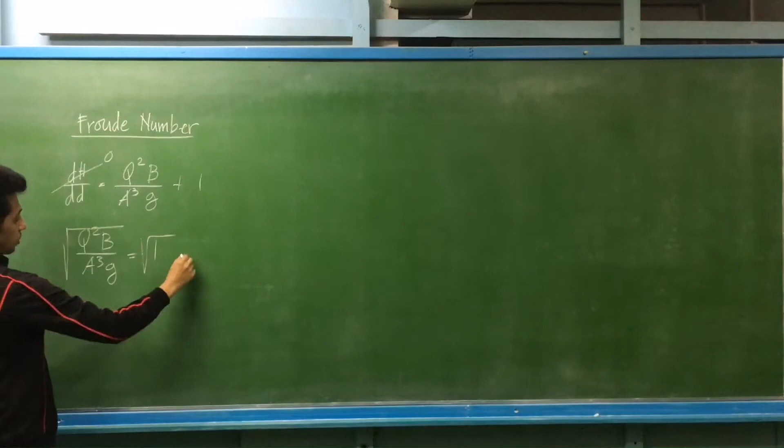So it's the same as discharge squared B divided by area cubed of the channel equals 1. If we take the square root of both sides, this is still equal to 1, or this is equal to the Froude number. So we have the formula for the Froude number for any shape of an open channel: the Froude number equals the square root of discharge squared times the top base, divided by area cubed times the acceleration due to gravity.

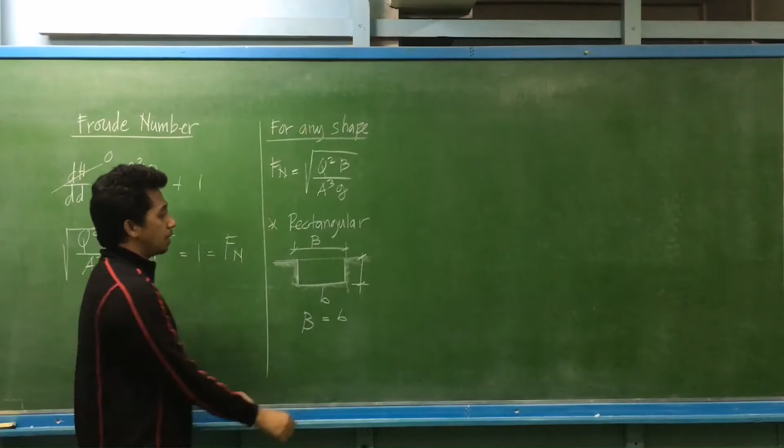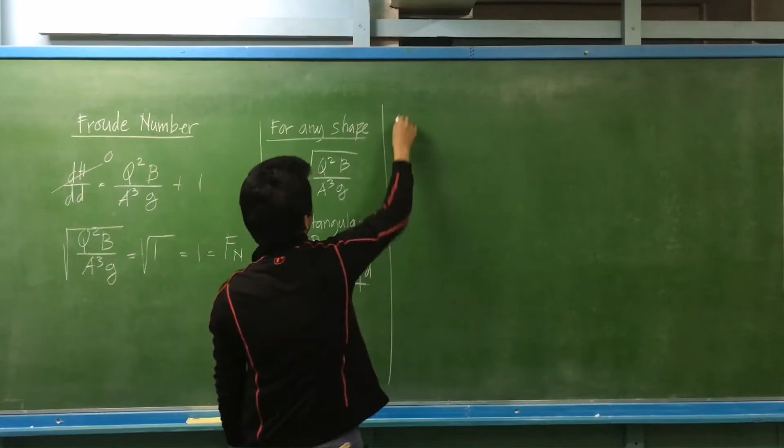So how about for rectangular? So for a rectangular channel, it has another formula since the top base of a rectangular channel is obviously equal to its bottom width. Let's say the top dimension is capital B, and this is small b. Basically when it's rectangular, they're the same. So we can simplify this formula for the case of a rectangular channel. The area of a rectangular channel is obviously base times depth.

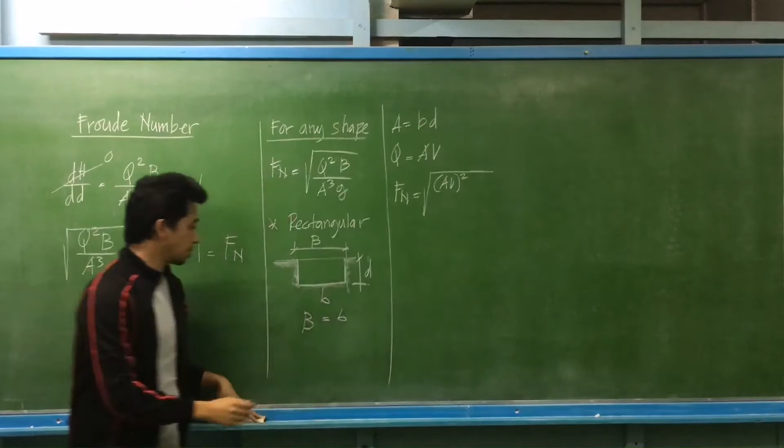What is the equivalent of discharge? Discharge equals area times velocity. So if we simplify this, the Froude number equals the square root of area times velocity squared, times the top base—but the top base is the same as the bottom width when rectangular—so I'll put it as small b, divided by area cubed times g. So we have the Froude number equals the square root of velocity squared times b, divided by area, times acceleration due to gravity.

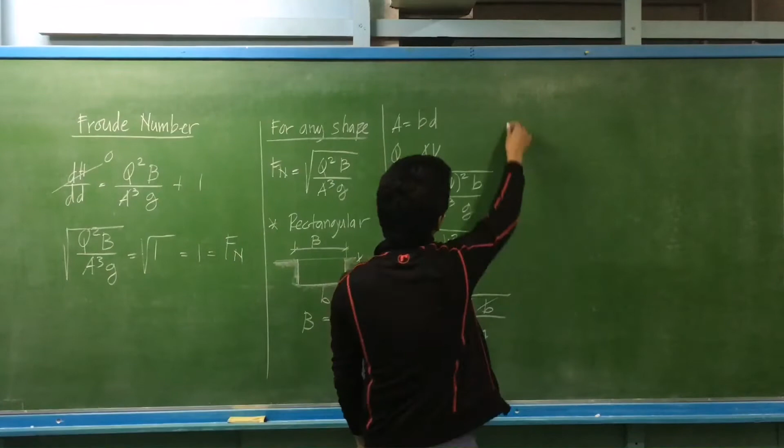So the Froude number equals the square root of velocity squared times the bottom width of the channel, divided by area—what is the area of this rectangular channel, that's base times depth—times acceleration due to gravity. We may cancel b, so we have the formula for the Froude number for a rectangular open channel equals the square root of velocity squared, divided by the square root of acceleration due to gravity times depth of flow. This formula is applicable only for rectangular sections; for any section, use the other formula.

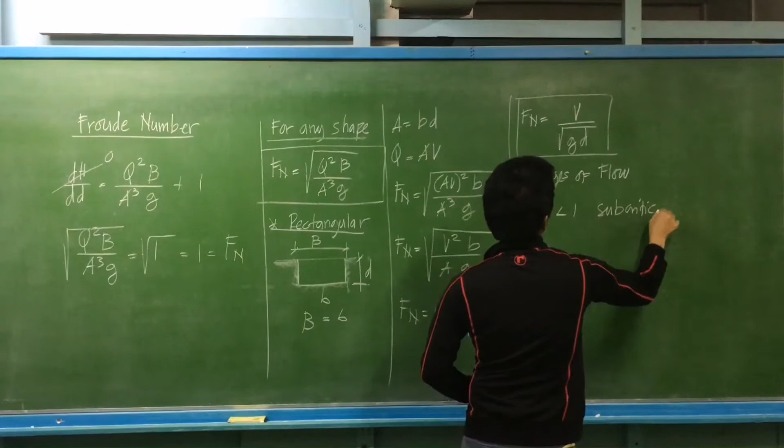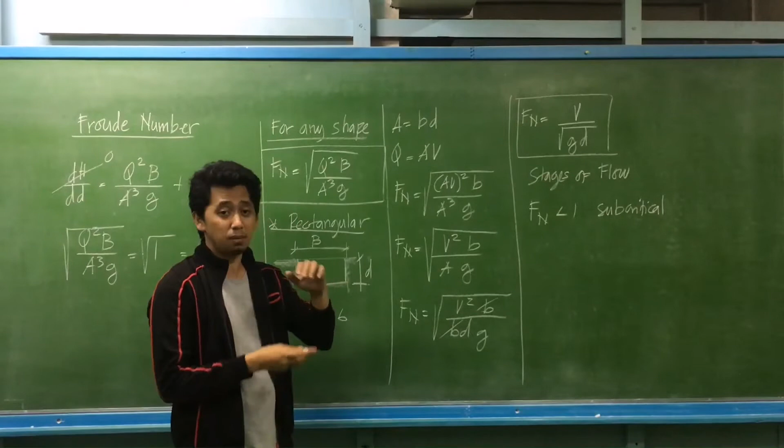So what is the purpose of the Froude number? That is to identify the stage of flow. So we have the stages of flow: if the Froude number is less than 1, this is subcritical flow. If we say subcritical flow with Froude number less than 1, that means a very low magnitude of velocity—slow flow—but the water in the open channel is deep.

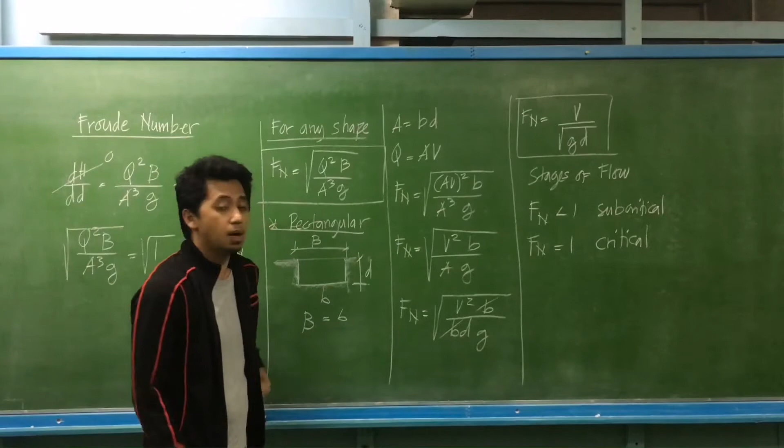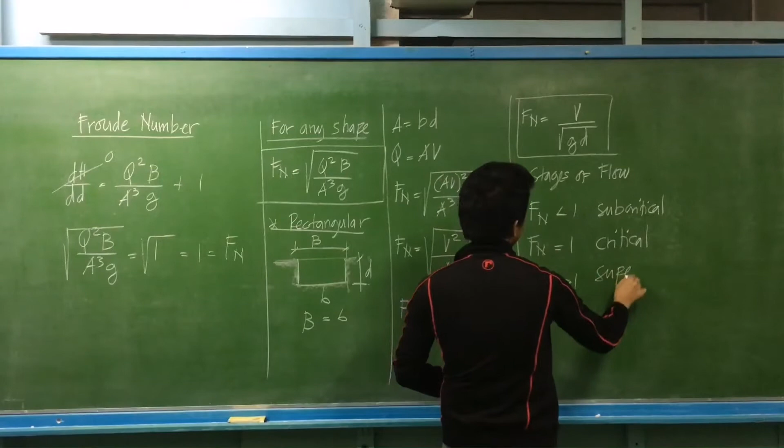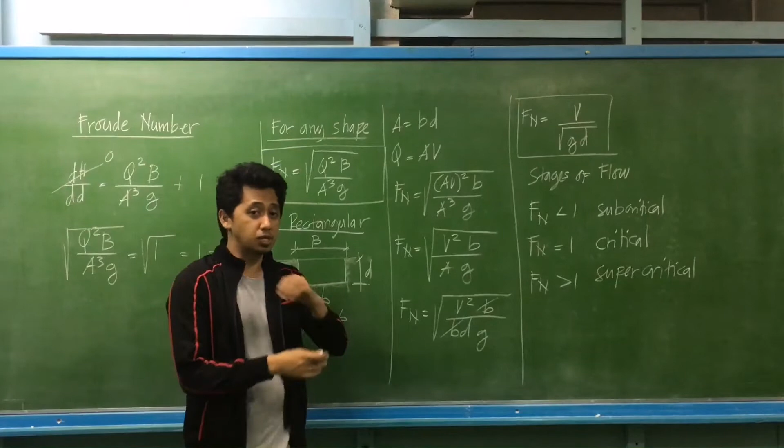And if the Froude number equals 1, this is the critical flow. So from our previous discussion, critical flow means maximum discharge but minimum specific energy. Then if the Froude number is greater than 1, this is supercritical. If we say supercritical, we have a very low water level in the open channel and a very fast discharge. So those are the stages of flow defined by the Froude number.

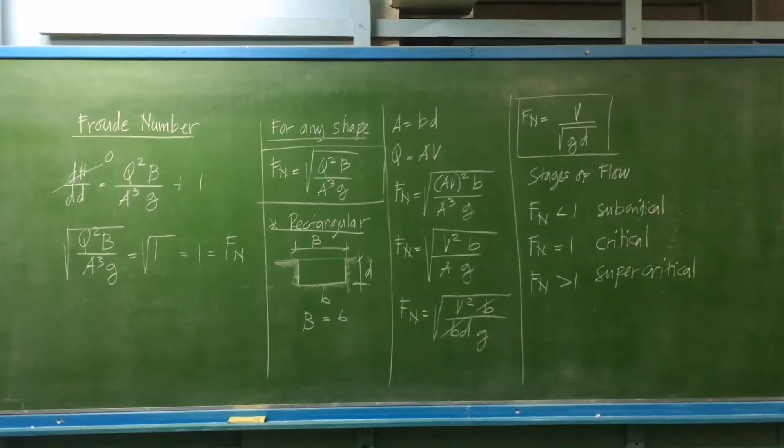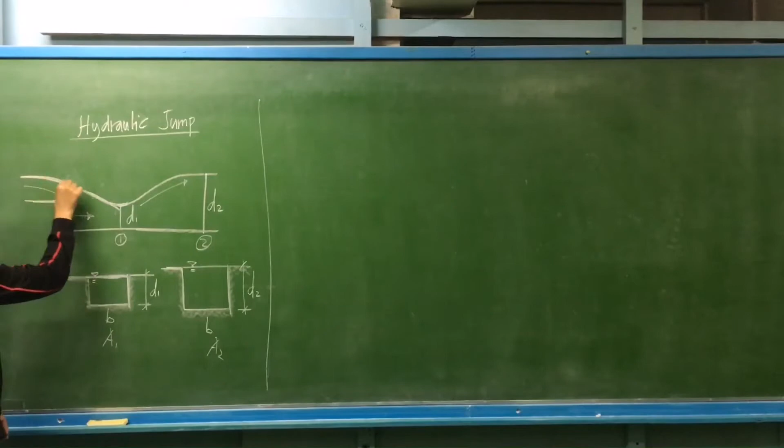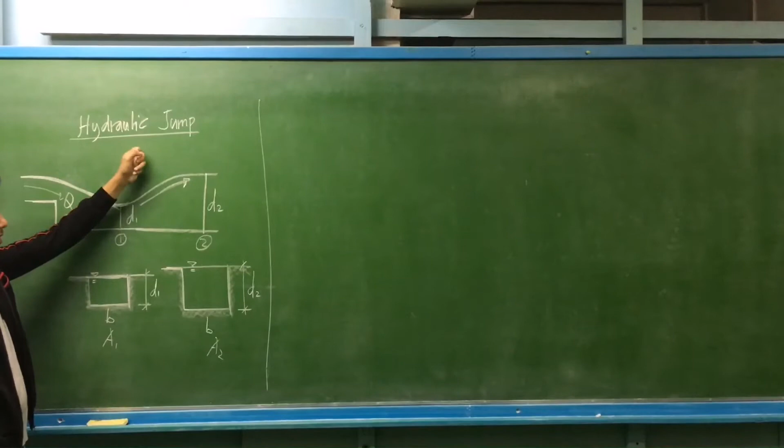This is the hydraulic jump. For example, we have a spillway, then we will be having a flow of water here. So suddenly we have a decreased depth of water, then a sudden increase. This portion is called the hydraulic jump. So we have section 1 with a very low level of water, D1, then a sudden increase, that is D sub 2.

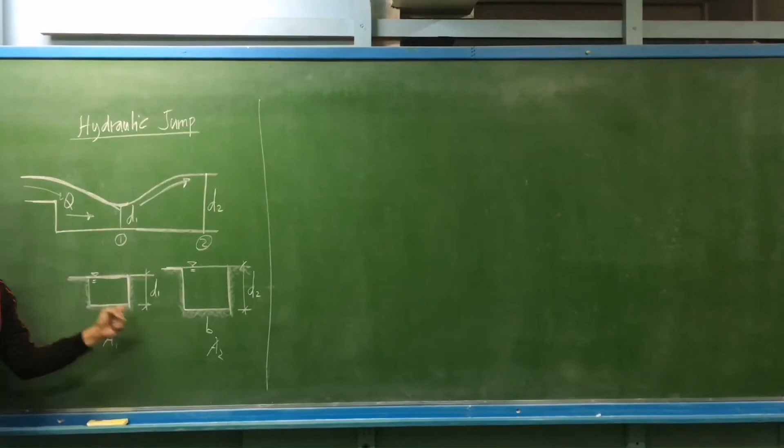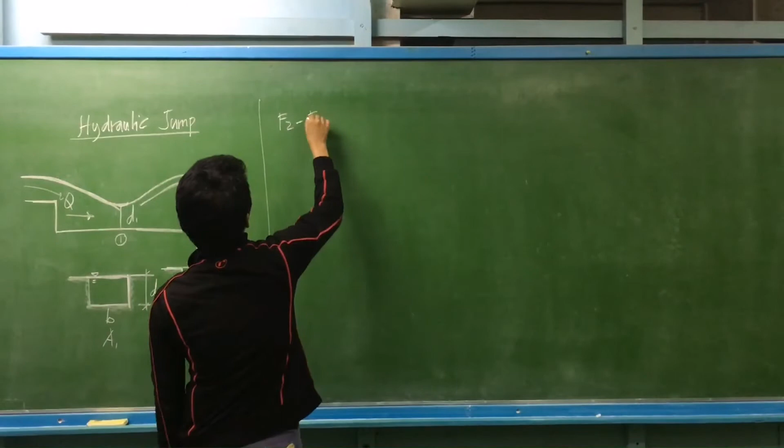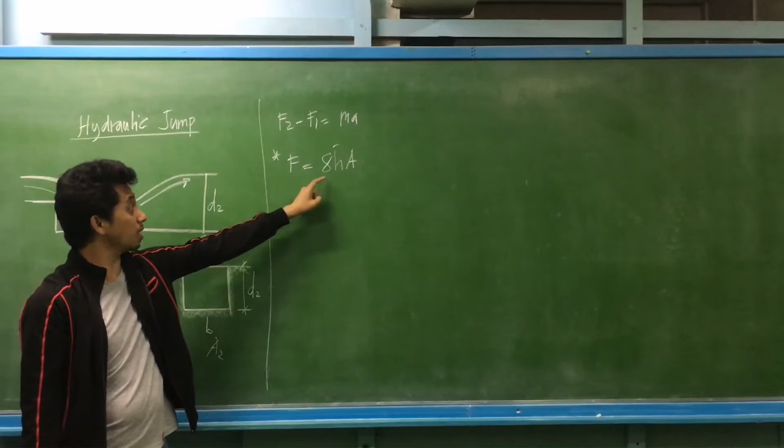Okay, first section, let's try a rectangular section. Applying Newton's second law of motion, the hydrostatic force of section 2 minus the hydrostatic force of section 1 should be equal to mass times acceleration. From fluid mechanics, hydrostatic force is gamma times h-bar times the area. How to convert mass... we can convert this later in terms of mass. So basically, rho equals mass over volume, so mass can be expressed as rho times volume.

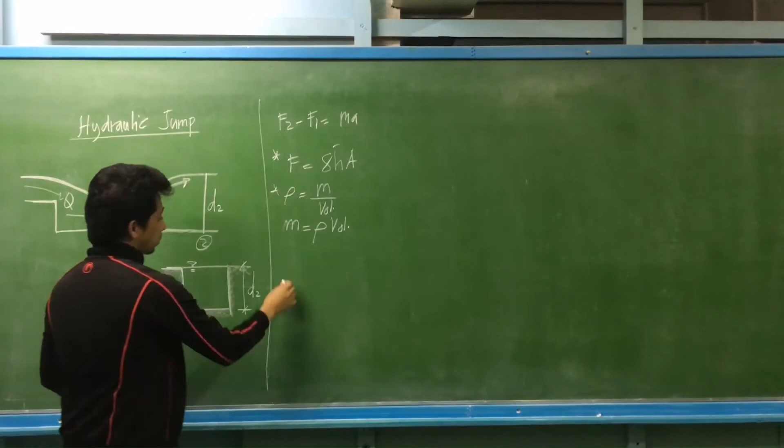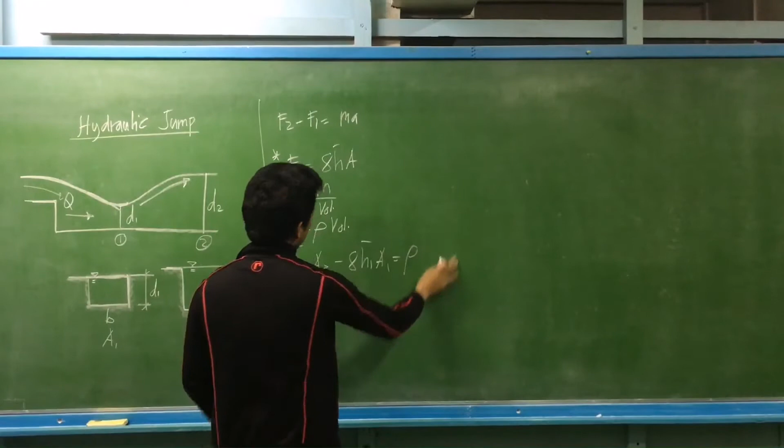So we have force number 2, that is gamma h-bar number 2 times area of section 2, minus gamma h-bar number 1 times area number 1, equals mass, which is rho times volume, times acceleration. What is the equivalent of acceleration? Acceleration is the change in velocity from V1 to V2, that is the velocity at section 1 to section 2, over time. So what is the equivalent of volume over time?

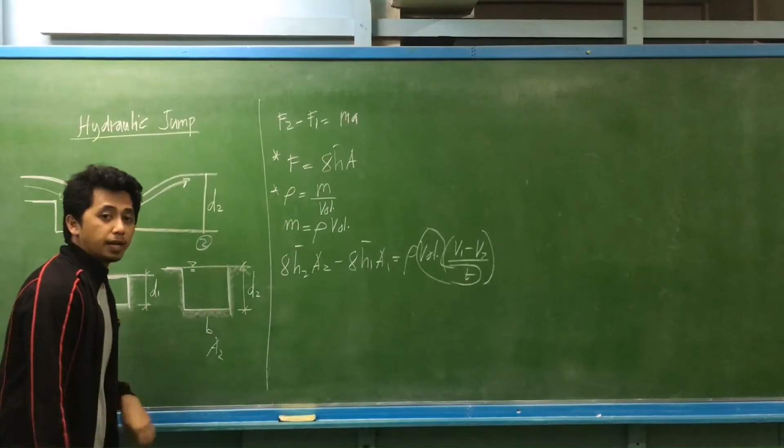So what is the equivalent of volume over time? That is the same as cubic meter per second. So that is the same as we have gamma h-bar number...

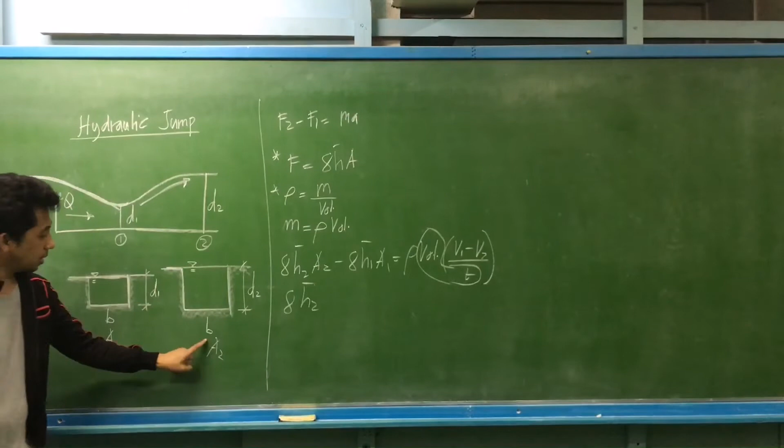What is area 2? Area 2 is the width, B times D2 minus gamma h-bar number 1. And what is area 1? That is B times D1. How to convert rho in terms of gamma? That is the same as gamma divided by acceleration due to gravity.

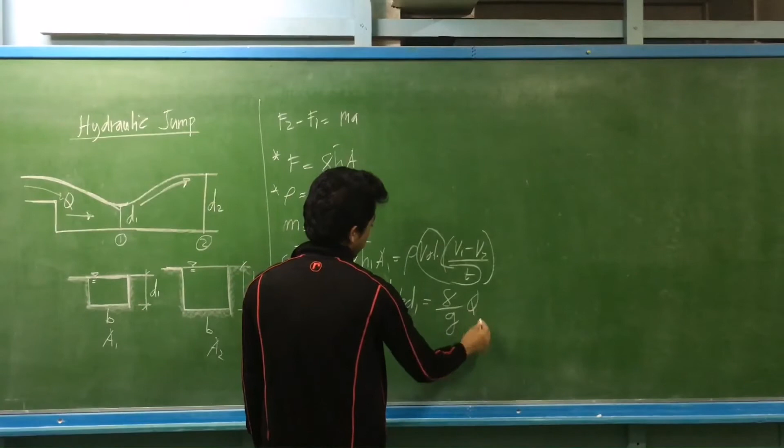What is volume over time? Volume over time is discharge multiplied by V1 minus V2. So we may cancel gamma in all terms.

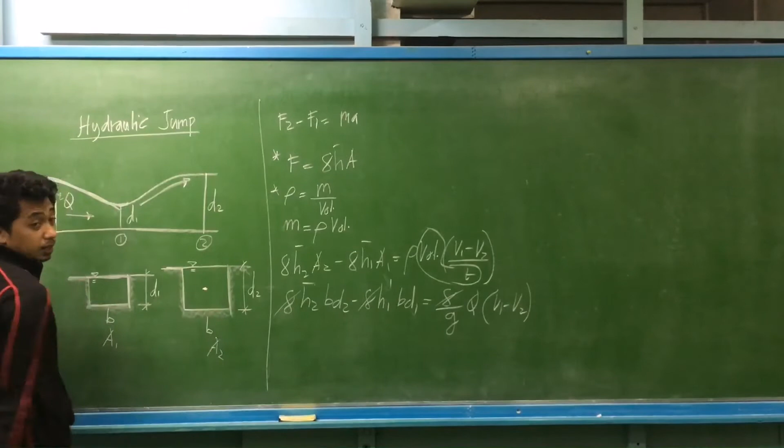So what is the equivalent of bar h? Bar h is the distance from the surface to the center of gravity. So bar h number 2, that is simply half of distance number 2. So this is the same as d sub 2 over 2, bd sub 2, minus the same with bar h1, that is the same as d1 over 2, bd1.

Then the remaining terms here will be discharge over the acceleration due to gravity. How do you express V1 in terms of discharge? We have basically discharge is equal to area times velocity. So velocity is discharge over area.

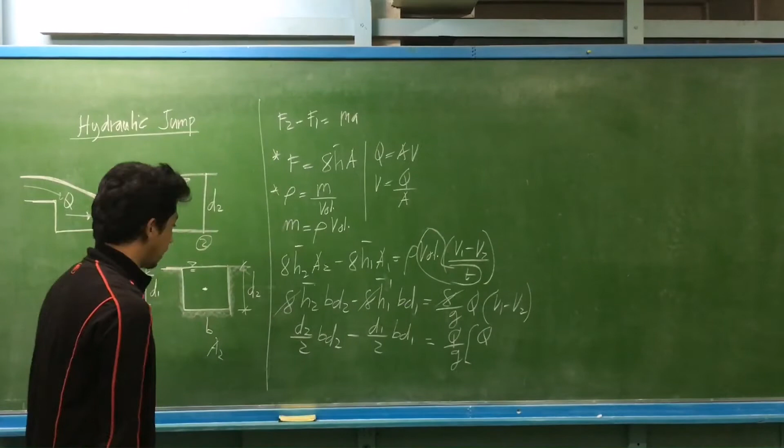So this is the same as discharge over area 1. What is the equivalent of area 1? Area 1 is BD1. Minus velocity number 2 is discharge divided by A2, so that is divided by area 2. What is area 2? B d sub 2. So this is B d sub 2. Okay, then we simplify.

So this is now the same as common denominator 2 on this side. We can factor out B. This is the same as d sub 2 squared minus d sub 1 squared is now equal to, factoring that out, that will be equal to discharge squared divided by, factoring out B, then the acceleration due to gravity. This is now the same as 1 over D1 minus 1 over D sub 2.

Okay, so we may still simplify. So this B, I'll move it to the other side. This is the same as D sub 2 squared minus D sub 1 squared divided by 2 is now equal to, okay, this is discharge over B times B, this squared, acceleration due to gravity. Simplifying this one, this is d1, d2. Then we have d sub 2 minus d sub 1.

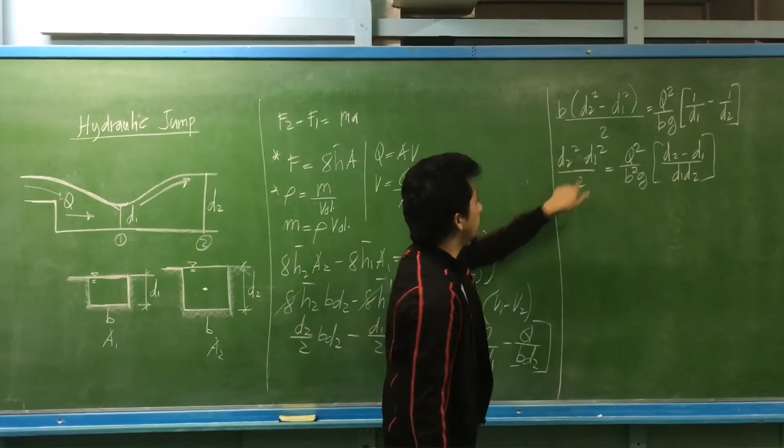Okay, then we may factor out this one. What is the factor of d sub 2 squared minus d sub 1 squared? That is the same as d sub 2 minus d sub 1 multiplied by d sub 2 plus d sub 1, divided by 2. What is discharge divided by the width? Discharge over the width, can you recall from our critical depth lecture? That is the same as the unit flow squared divided by the acceleration due to gravity, multiplied by d sub 2 minus d sub 1 divided by d1, d2.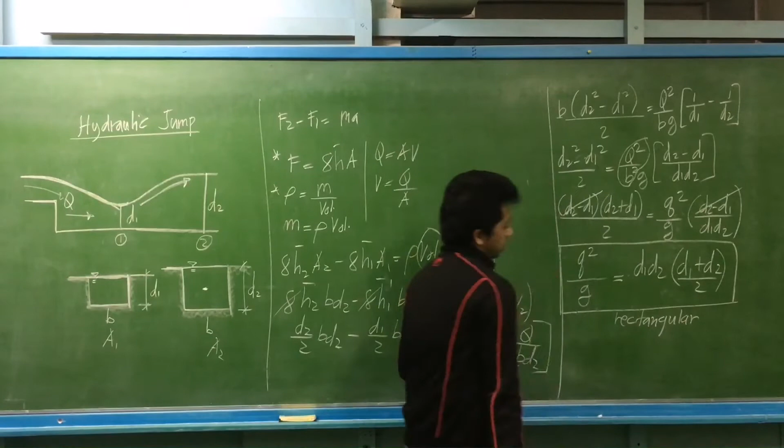So we may cancel d sub 2 minus d sub 1. So we have in the equation, this unit flow squared divided by acceleration due to gravity is now equal to d1, d2 times, let me alternate, d1 plus d2 divided by 2. So this is the formula for the hydraulic jump. Take note, this is applicable for rectangular channels only, or rectangular open channels.

So what about for any section? How do we compute for what formula can be used for any section? So you may start on this portion, this part here. So on that part, that is gamma H2, or yes, I think we can use this here.

So you have gamma bar H2, area number 2 minus gamma bar H1, area number 1 is on this portion, that is gamma discharge over acceleration due to gravity, multiplied by V1 minus V2. So again, you may cancel gamma. So this is the same as area 2 bar H number 2 minus area 1 bar H number 1 is equal to discharge squared over G.

So here, what is the equivalent of V1? That is, supposedly discharge, this portion here, discharge over area. So it's 1 over area 1 minus 1 over area 2. Supposedly discharge over area, I just factored out the discharge. So we'll be having the formula: discharge squared divided by acceleration due to gravity is now equal to...

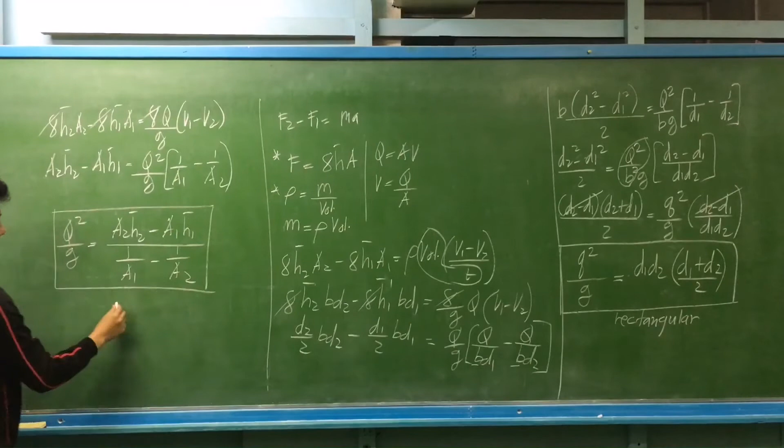Area 2, okay, so this is discharge squared divided by acceleration due to gravity. Area 2 bar H number 2 minus area 1 bar H number 1, all over this one: 1 over area 1 minus 1 over area number 2. So this is applicable for any shape. So you may use this one for trapezoidal or triangular section.

So let's have an example.

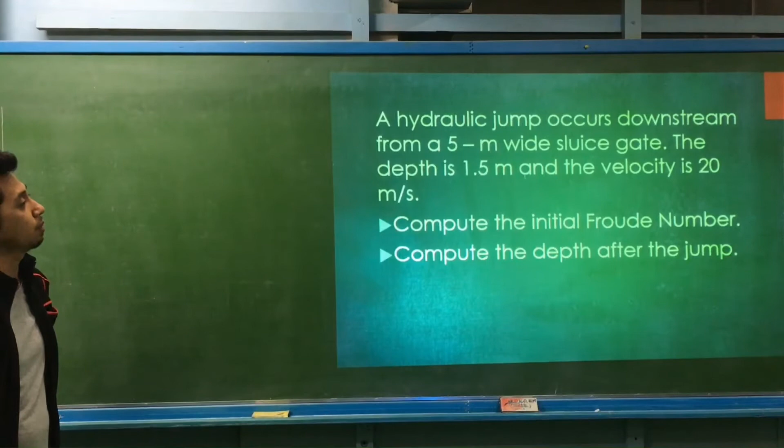Example on hydraulic jumps. A hydraulic jump occurs downstream from a 5-meter wide sluice gate. The depth is 1.5 meters and the velocity is 20 meters per second. So we have an open channel equivalent with a width of 5 meters.

The initial depth, depth number 1, is equal to 1.5 meters. The velocity at section 1 is given, V1 is equal to 20 meters per second. The first requirement is to compute the initial Froude number.

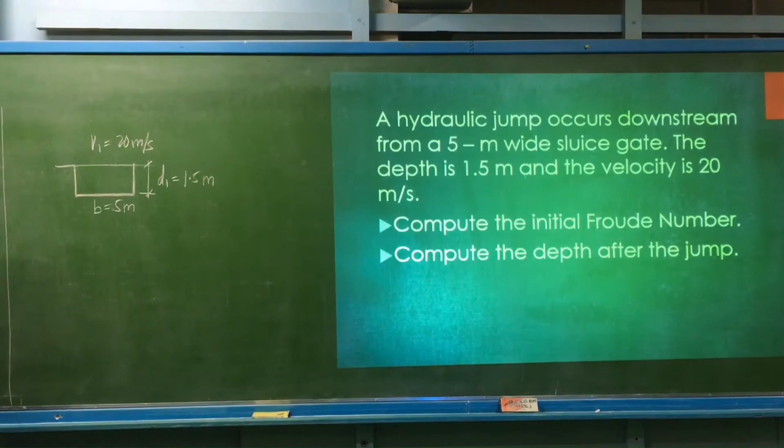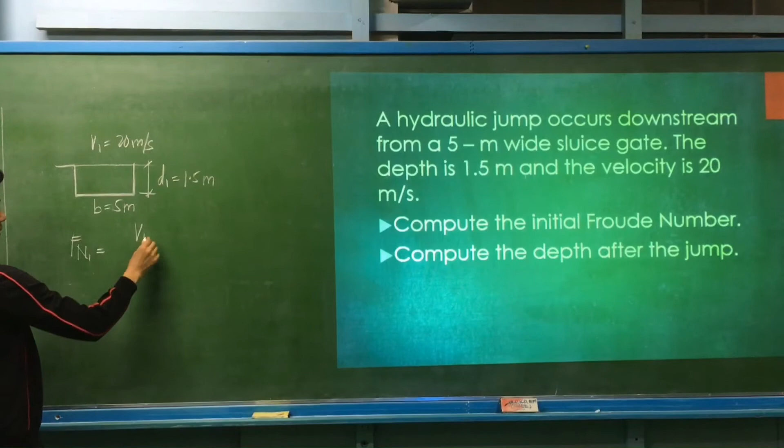Since the channel is rectangular, the Froude number for section 1 is equal to V1 divided by the square root of acceleration due to gravity times the depth of flow, d1. The given velocity is 20, divided by the square root of 9.81 times 1.5, the initial depth. Let us compute for the initial Froude number.

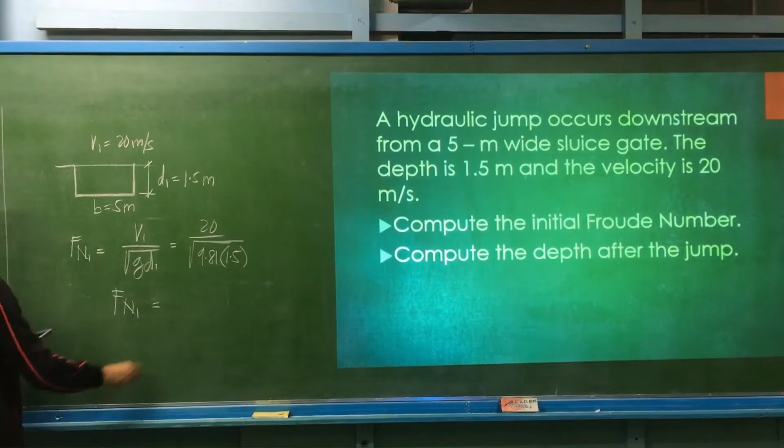The initial Froude number is 5.21. This is obviously greater than 1, so therefore the stage of flow is supercritical flow, which means the flow is shallow but very fast. Okay, a very fast flow.

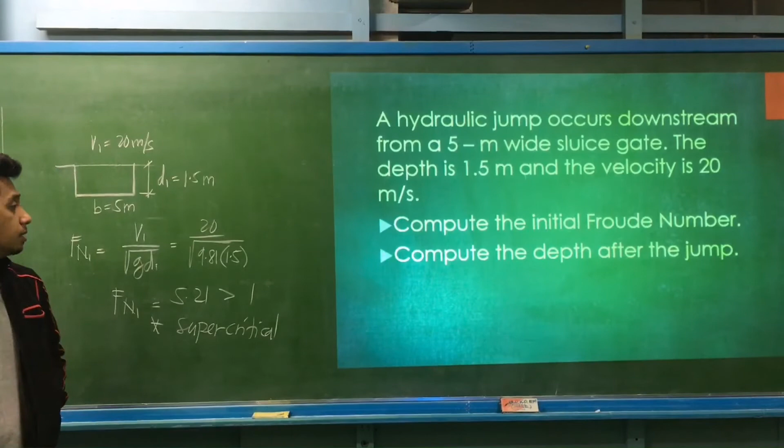The next requirement is to compute the depth after the jump, that is depth number 2. So we are looking for depth number 2. We need first the discharge.

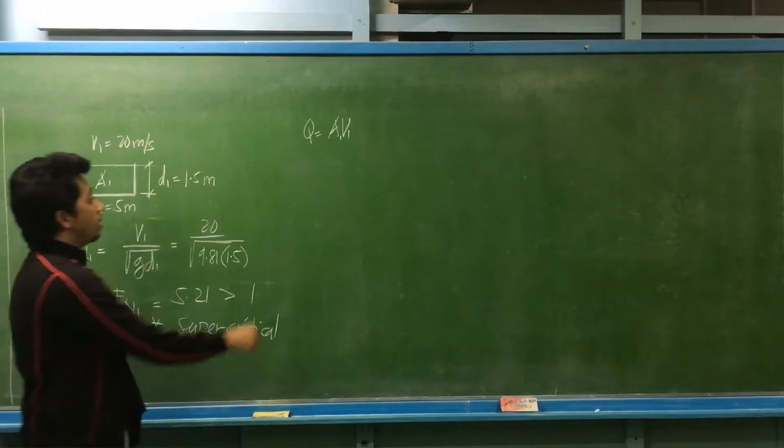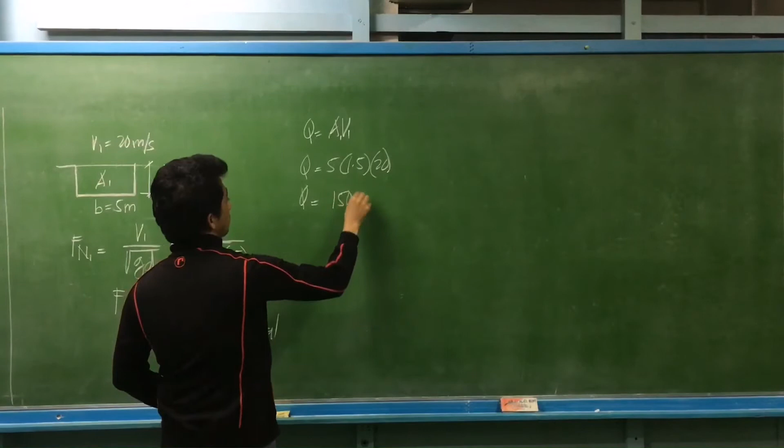Discharge is equal to area times velocity. We can use area number 1, so we'll have discharge equal to area 1, that is 5 times 1.5, multiplied by the initial velocity given, 20. So the discharge is equal to 7.5 times 20, which gives 150 cubic meters per second. 20 times 1.5 is 30, times 5 is 150, so the discharge is equal to 150 cubic meters per second.

Afterwards, we need the unit flow. How to determine the unit flow? This is the discharge divided by the width of the channel. So the unit flow is equal to discharge 150 divided by the width, which is 5. So the unit flow is equal to 30 square meters per second.

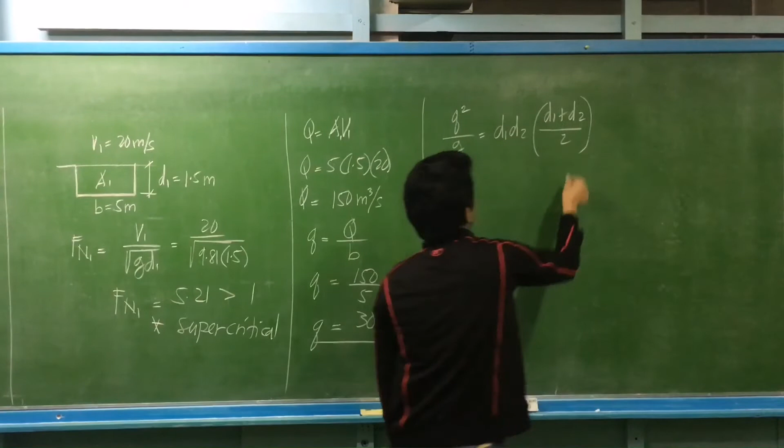Since we are dealing with a rectangular open channel for the hydraulic jump, we can use the formula: the unit flow squared divided by acceleration due to gravity is equal to d1 times d2 multiplied by d1 plus d2, divided by 2. So we are looking for depth number 2, that is the depth after the jump.

So we have the unit flow, 30 squared, divided by 9.81. Depth number 1 is 1.5, depth number 2 is unknown, multiplied by depth number 1, 1.5, plus depth number 2, divided by 2. Computing for depth number 2, we get depth number 2 is equal to 10.335 meters. So that will be the depth of flow on section number 2.

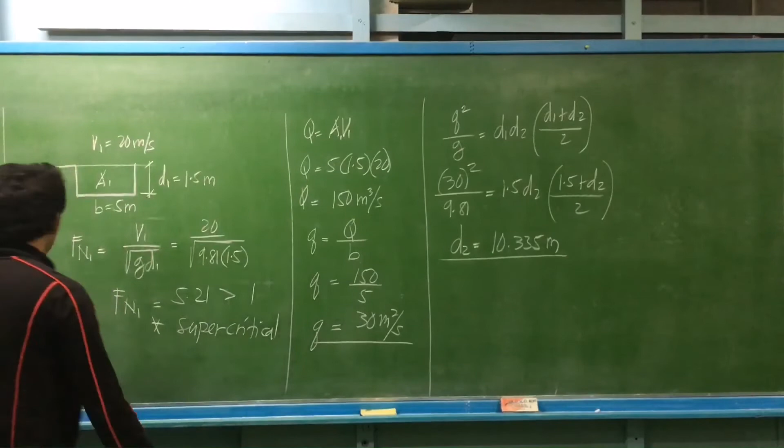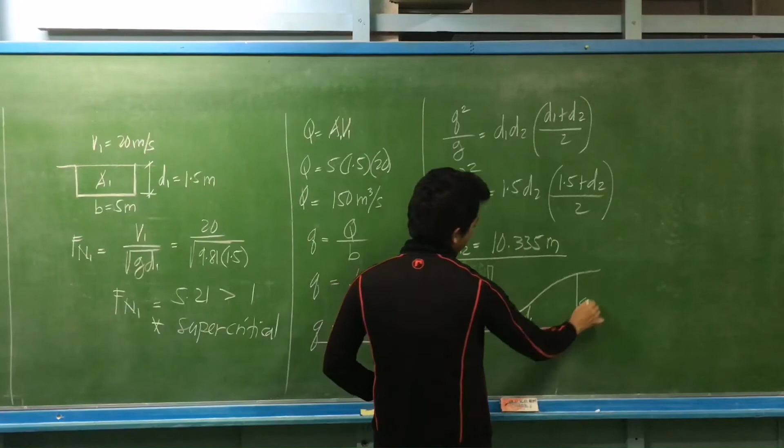So this is a sluice gate. For example, this is your reservoir. When it's a sluice gate, it releases water at the bottom, causing a contraction, then suddenly the depth rises. So possibly this is your depth number 1, and after a certain distance from the opening, this is depth number 2. So that's roughly the illustration: the initial depth is 1.5, then suddenly it becomes 10.335 meters. That is for a rectangular section.

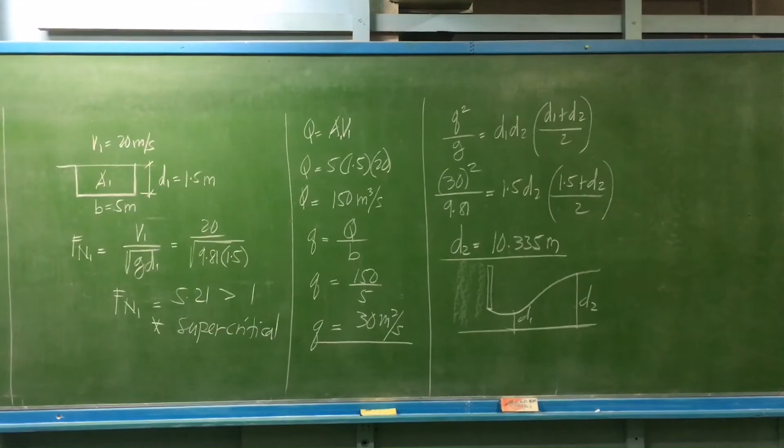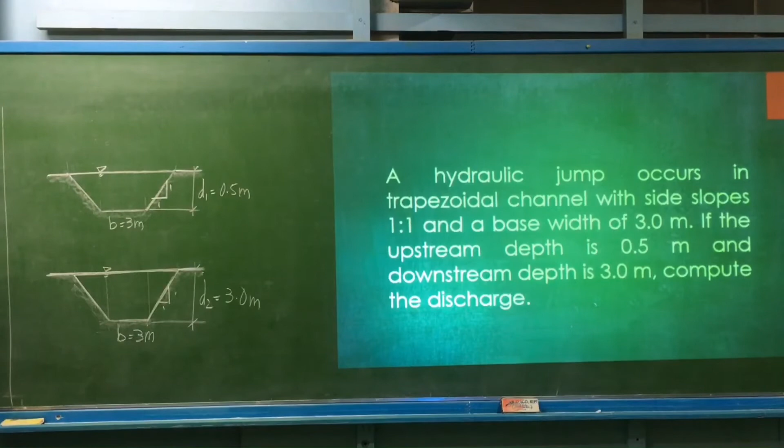Let's try a non-rectangular channel, specifically a trapezoidal channel. A hydraulic jump occurs in a trapezoidal channel with side slopes at 1:1 and a base width of 3 meters. If the upstream depth is 0.5 meter and the downstream depth is 3 meters, compute the discharge.

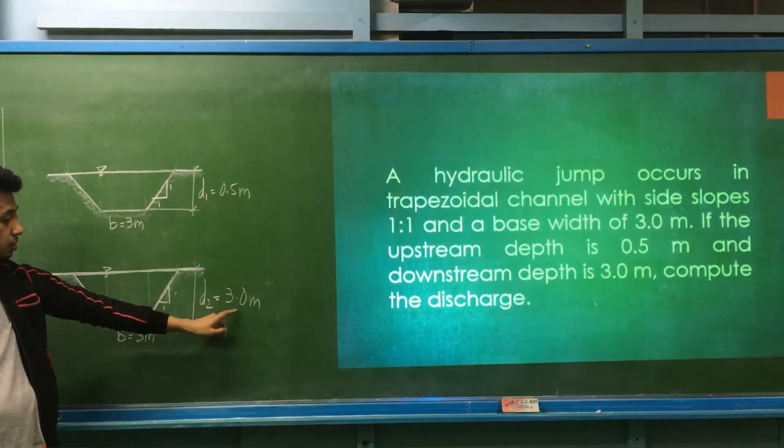So before the jump, this is section 1 at 0.5 meters depth. After the jump, it rises to 3 meters. Let us compute for the discharge.

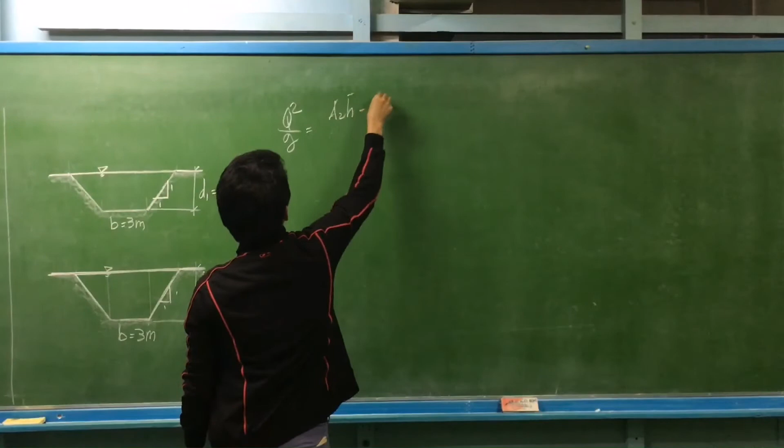We have the formula for the discharge: discharge squared divided by acceleration due to gravity is equal to area 2 times h-bar 2 minus area 1 times h-bar 1, all over 1 over area 1 minus 1 over area 2. Since it's not rectangular, it gets a bit complex, so what we need to do is determine these values first, then substitute.

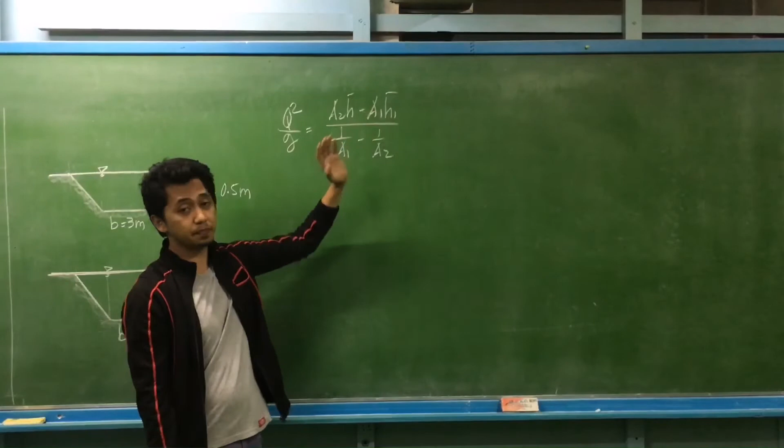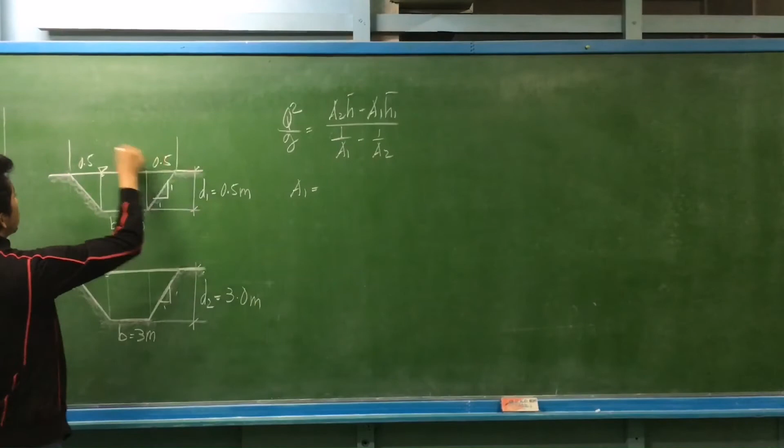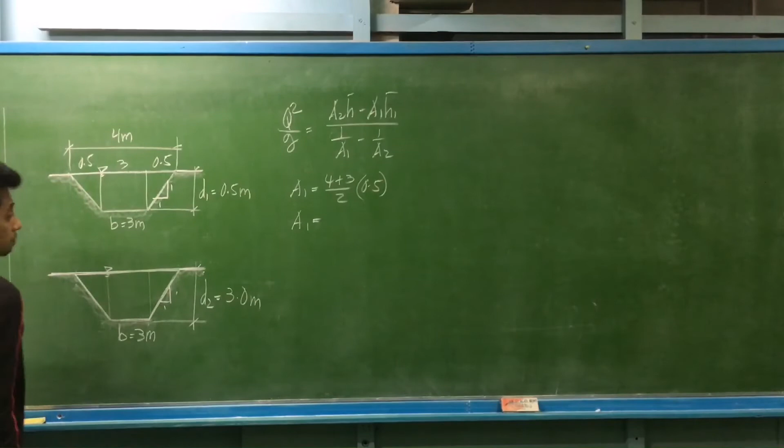What will be the value of area 1? Area 1 is the area of a trapezoid. Since the side slope is 1:1, this gives a dimension of 0.5, with base 3 meters and another side 0.5. So the top base will be 0.5 plus 3 plus 0.5, which is the same as 4 meters. The area of a trapezoid is the top base 4 plus 3, over 2, times the depth 0.5. So area 1 is 7 over 2, that is 3.5, times 0.5, giving 1.75 square meters.

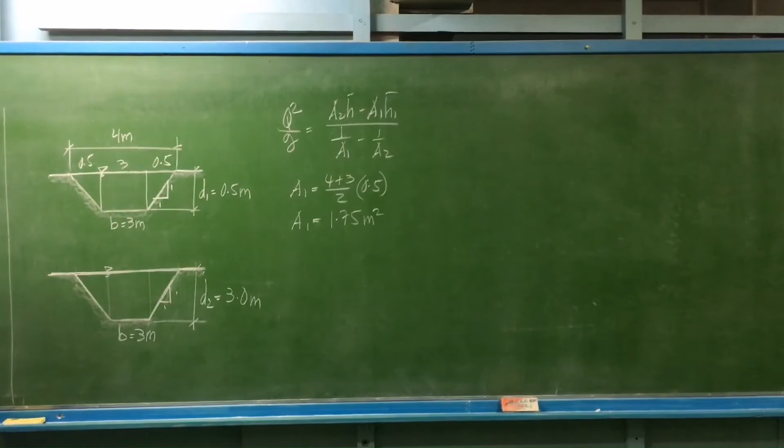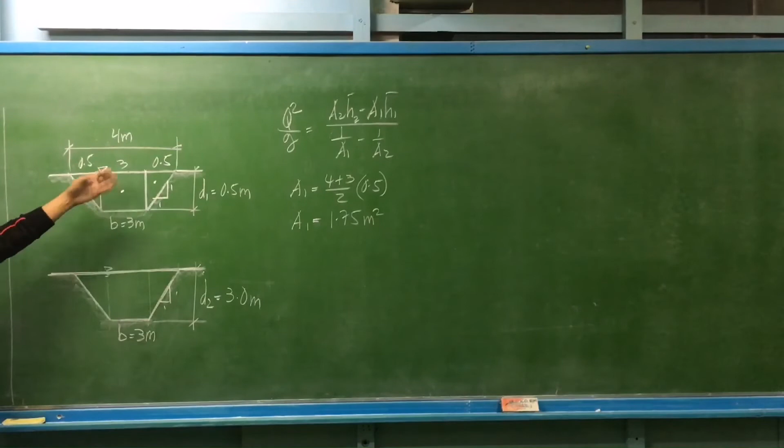Then we have, how about the value of bar H1? This is bar H2. As you can see, we may separate the sections into triangles and rectangles so it's not hard to get the centroid. We have two triangles, it's easier to locate the centroid compared to locating it for the whole trapezoid. So we have, let's say, summation of area 1 bar H1.

Let's start with the rectangular portion. The rectangular portion is 3 meters by, the height is 0.5. The centroid will be half of 0.5. Just half of it, that is for a rectangle.

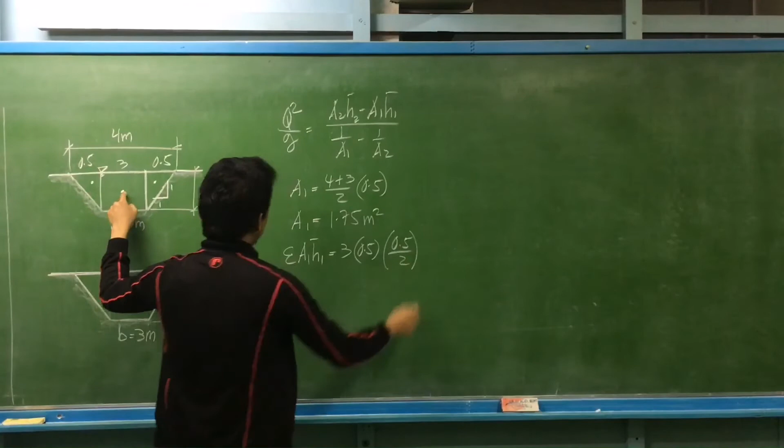Then plus, we have two triangles on the side, so that is multiplied by 2. So area, that is 1/2 the base is 0.5 times 0.5. What is the location of their centroid? Centroid of a triangle from the surface is 1/3 of 0.5.

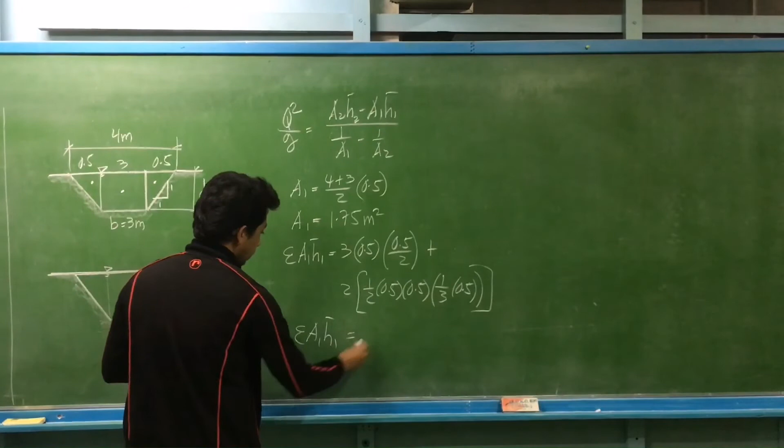So this is the summation of area 1 bar H1. Take note that if you are measuring bar H1, that is coming from the surface. So we have that equal to 5 over 12 cubic meters. Take note that is area times the bar H. So 5 over 12 cubic meters.

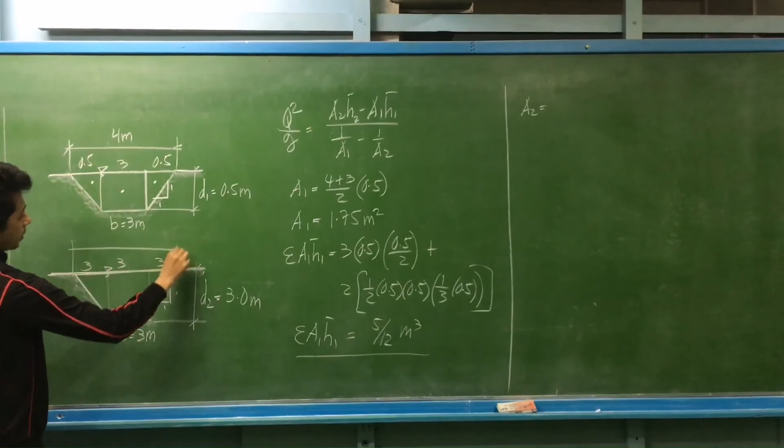Then we proceed to section 2. So for section 2, we have area number 2. This is 1:1. The depth is 3, so this is 3 meters, 3 meters, 3 meters. So we'll be having a top base. Obviously, it's now equal to 9 meters.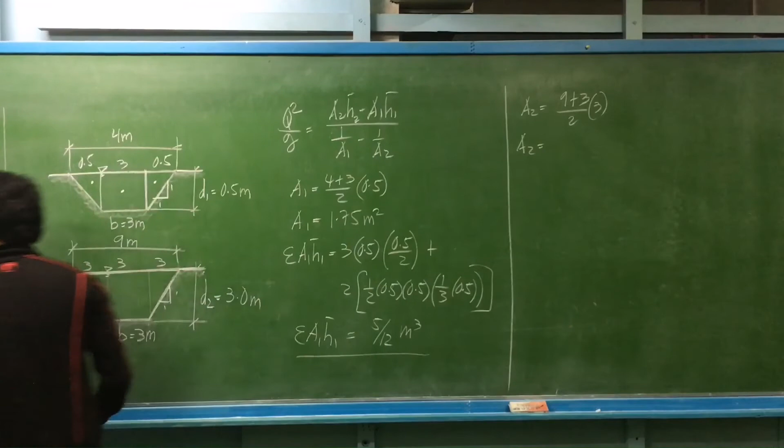So area of a trapezoid, that is 9 plus the bottom base 3, divided by 2, times 3. So area number 2 is equal to, that is 9 plus 3 is 12, divided by 2 is 6, times 3, this is 18 square meters. Tama ba? Yes, it is 18 square meters.

Then again, we have the summation of area 2 bar H number 2. Again, all you have to do is locate the centroid of these areas from the liquid surface, from the surface of the open channel. So let's start with the rectangular portion, that is a square, 3 times 3, times centroid is, half of 3, 1.5, plus

the triangular portion, we have 2. That is 1/2 of 3 by 3. Then, the center of the triangle is 1/3 of 3, or simply equal to 1. So let us compute the summation of area 2, bar H number 2, for the second section.

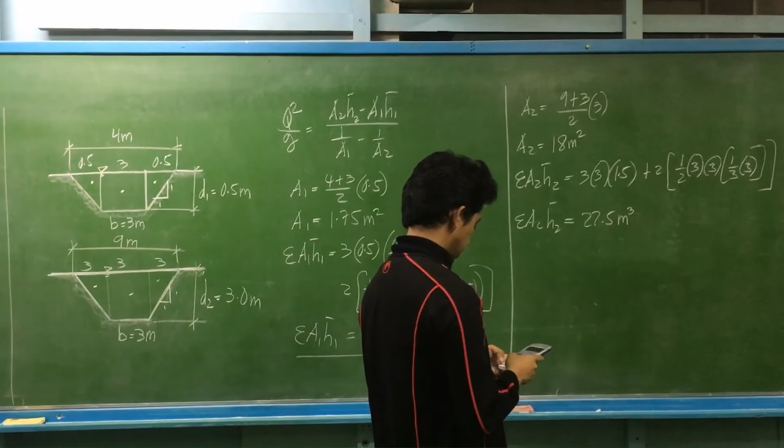So this is equal to 22.5 cubic meters. Let's check. We have 22.5. Right now we have the values.

All we have to do is substitute. So we have the discharge squared divided by 9.81. What is area 2 bar H2? That is 22.5, minus, what is area 1 bar H1? Area 1 bar H1 is the same as 5 over 12.

This is all over 1 over area 1. What is area number 1? Area number 1 is equal to 1.75 square meters. So this is 1 over 1.75 square meters, minus 1 over area 2. Area 2 is 18 square meters. So let us take 1 over 18 square meters.

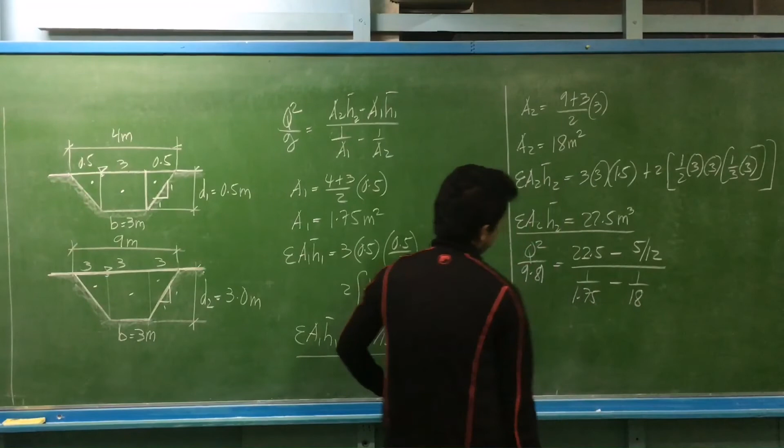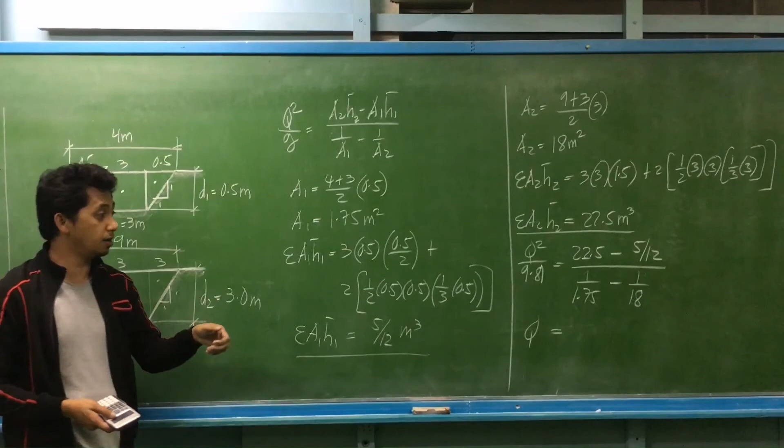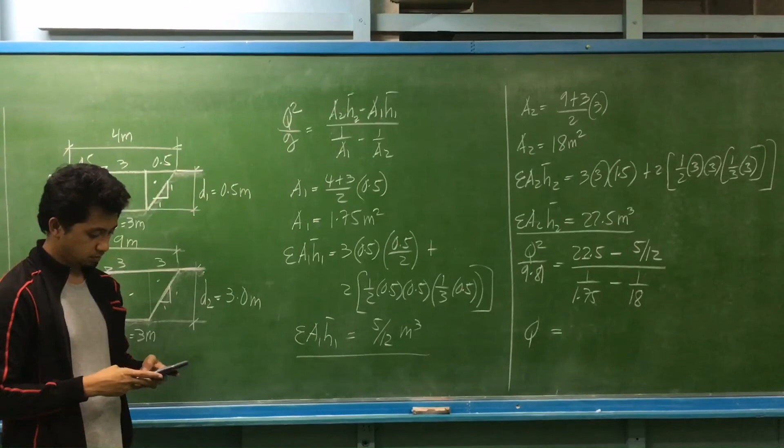So let us compute for the discharge. Basically, the purpose of this is to compute discharge by measuring the head just before and after the jump, just to measure the discharge. So we have the discharge equal to 20.493 cubic meters per second.

So one application of the hydraulic jump is to measure discharge. If you are to do this in an experiment, we have the initial depth before and after the jump. This is before the jump, this is after the jump. So by just measuring these two depths of water in that open channel, you can compute for the discharge.

So how about, by the way, this hydraulic jump can cause head loss because of this contraction. So if you are to construct the energy equation, we will be having D1 as your elevation head. Then we have the velocity head, that is the V1 squared over 2G. Take note, we don't have a pressure head since this is an open channel.

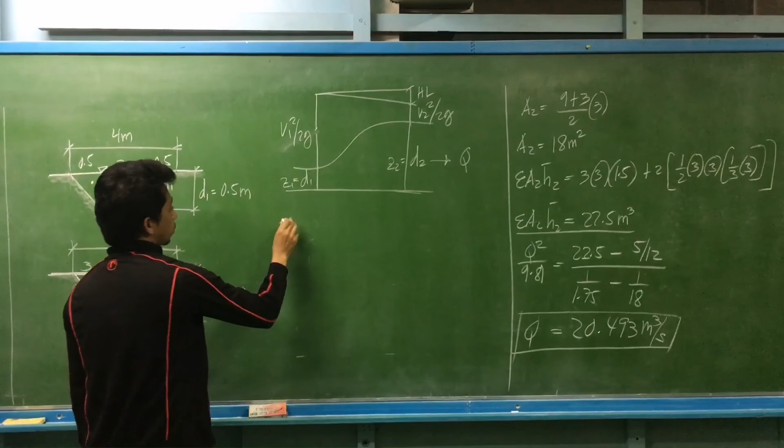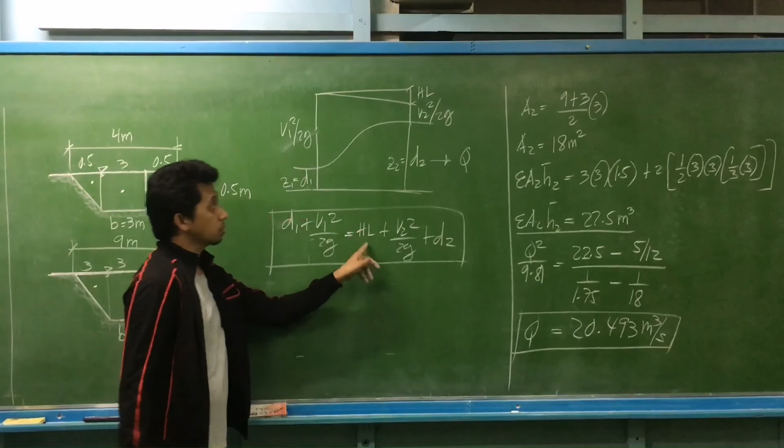Then a head loss on the other side, head loss, then the velocity head at number 2. So if you have to construct the equivalent energy equation, this is the same as elevation at 1, that is the same as depth number 1, plus V1 squared over 2G, is equal to the head loss plus V2 squared over 2G, plus depth number 2. So in this equation, you may compute the head loss caused by the hydraulic jump. And that is for the hydraulic jump.